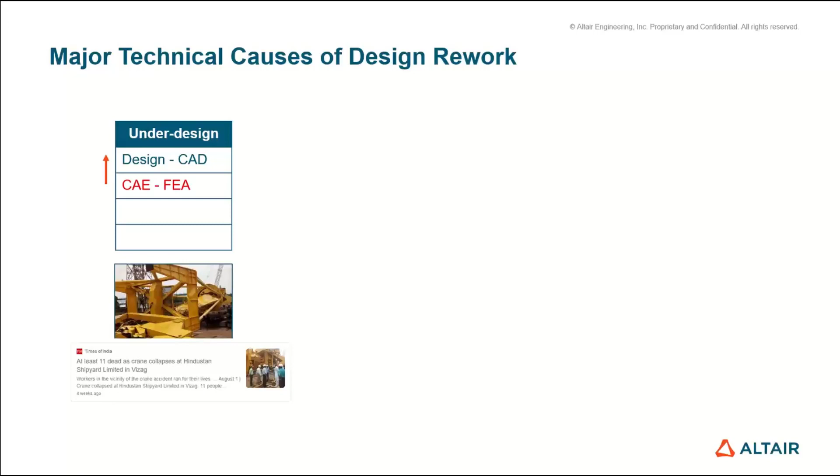This will cause a time delay. On the other hand, over design is not that critical, and sometimes it goes unnoticed for many reasons, and that also affects us on the project side because it adds to our material cost as well as other operational costs. If it gets noticed, that will again create a loop of redesigning.

The next one is integration issue, where especially when projects are complicated or mechanisms are involved, there might be integration challenges. Although the design is well designed, there might be integration challenges, interference, or unnecessary clearances. These things create problems at the integration stage, and that might come back and create a redesign or rework loop.

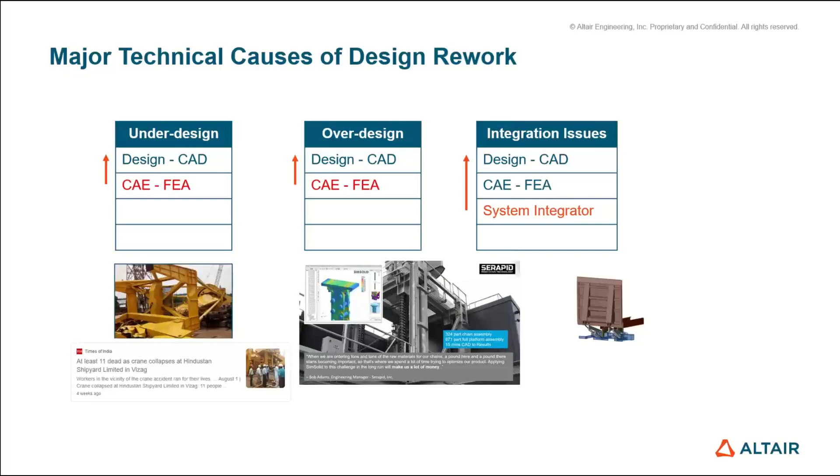Another critical one is manufacturing issue, which might get detected during the supplier or prototype stage - it can be detected either at the supplier end or the prototype end. Again, it can come back to the design stage and create the design rework loop.

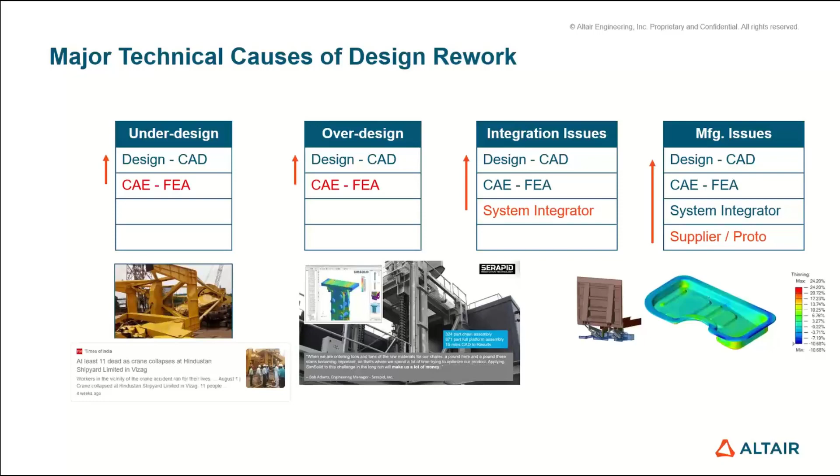So to address this issue through our tools, what I am going to talk about today is the Altair tool or platform called Inspire, which is our simulation driven design platform.

We will take an example to show how these different causes of design rework can be addressed using different parts of this platform. For those who don't know Inspire, this is a very easy to use yet accurate platform which has a unique capability to interact with multiple of our proven solvers, like MBD solvers such as MotionSolve.

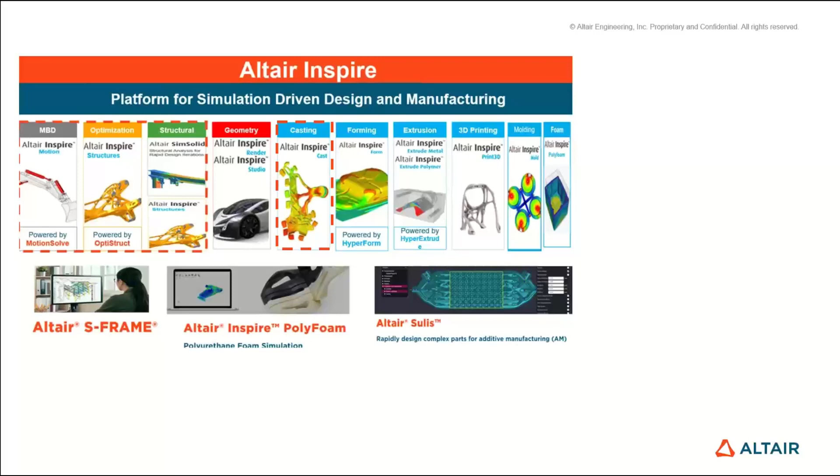It can be interacted with or accessed - it can access the solver like OptiStruct, and it can also access our different set of manufacturing solvers like casting solver or injection molding solver and so on. It also can access our newly acquired solver, that is SimSolid.

For those who don't know SimSolid, it is a structural simulation solver that operates directly on original, unsimplified CAD geometry and doesn't require a mesh to be created. It also gives very accurate results in a much faster time span.

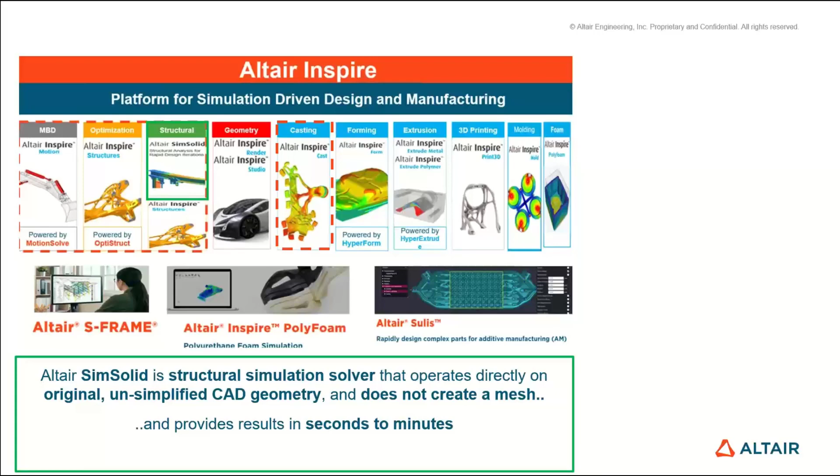So all these things together, we'll see how to take and solve those design rework issues by taking the example of a hydraulic tailgate lift. This is an attachment mostly for a pickup truck, where a heavy component can be lifted in the pickup truck easily because this platform moves with hydraulic actuation.

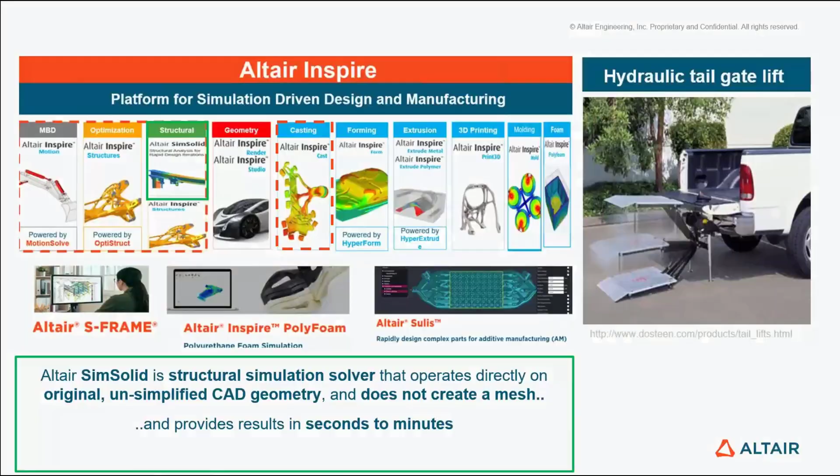It also acts as a flap to close the pickup truck's end. So without further ado, let's go to the tool and show how these things really work.

We'll start with the CAD version of that hydraulic lift, and then what we'll do is in the first stage, use the SimSolid solver.

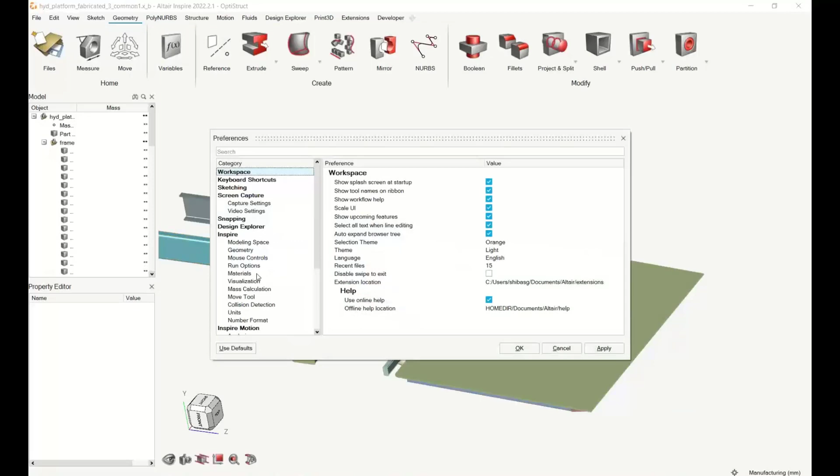We'll use the solver as SimSolid here, and then what we'll do is try to apply the necessary loading condition. In this case, we are going to apply a 2.5 ton load, and we are going to apply the boundary condition.

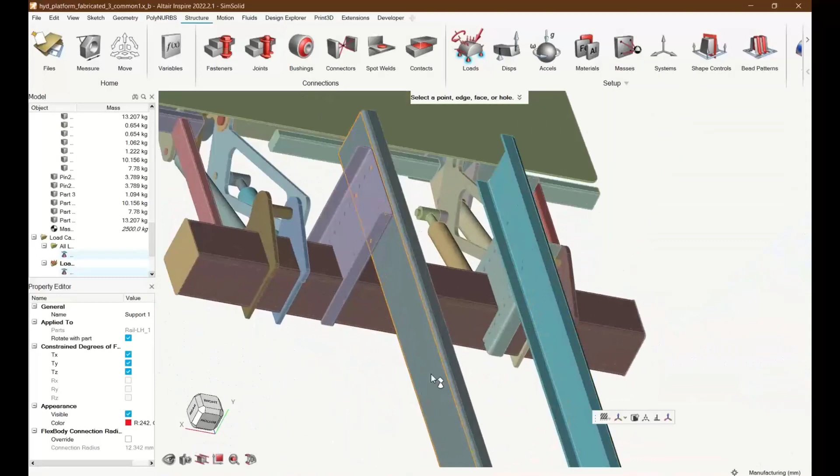Basically, this is where we are fixing this structure, and this is part of your car structure. We also have to make sure that our gravity direction is in proper manner, and then we'll ensure that our connections are created all right.

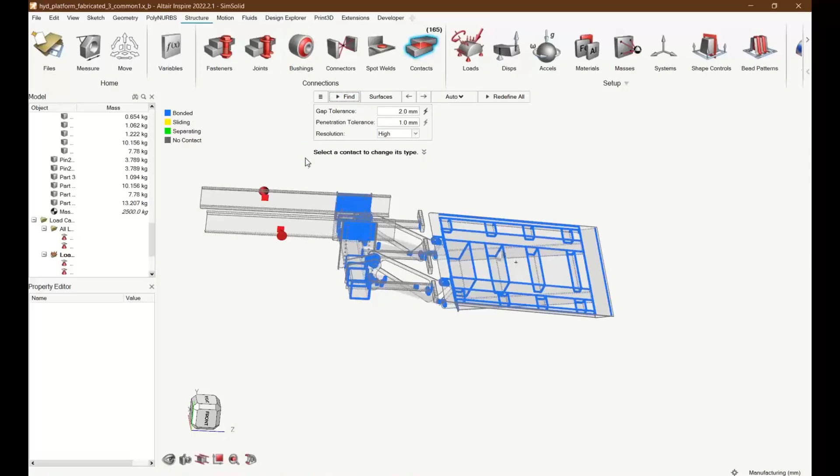So here I am trying to create a little more detailed connection. I know I'm not going very deep into each of these tools. The reason for that is there will be subsequent sessions where each tool will be explained in greater detail.

So now once this much is done, we can go ahead and run our first iteration of the solution simulation to understand whether it is under design or over design, or how is the stage. As I said, it is using SimSolid as a solver, and SimSolid has its own unique capabilities of not needing a created mesh, and also the speed.

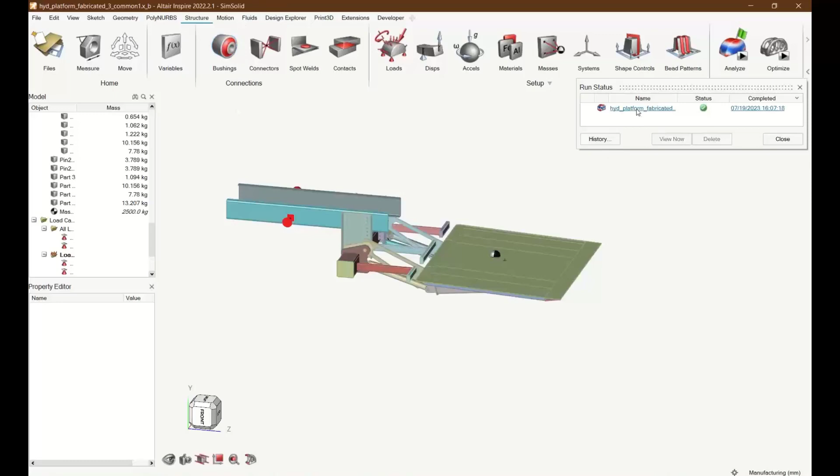And you can see that over here. This is a reasonably big platform, and you can see that I am getting a kind of displacement or deformation in the range of say 23 mm.

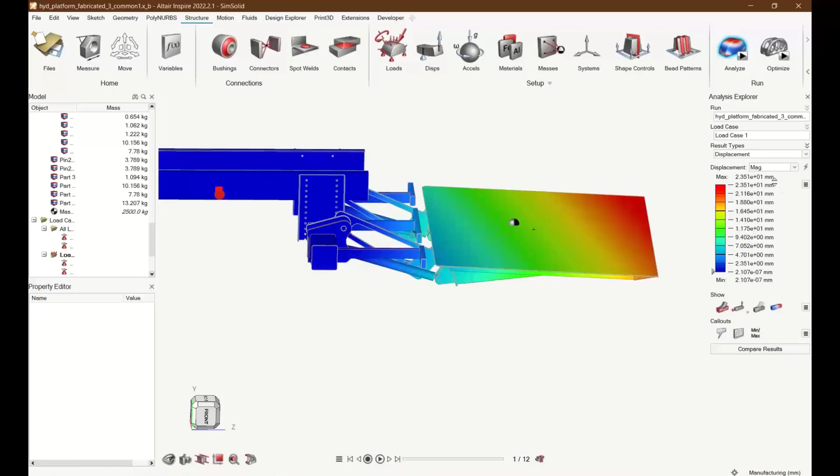Anything beyond 21 is not considered a very good design. Of course that number can be debated, but for this particular application, I am fixing that at 21. So with that logic, this goes into under design.

So now the question is, if there is under design, how to tackle this under design? There can be many things which can be changed in the structure, but for this particular use case, what we are changing is this: we are focusing on these two arms.

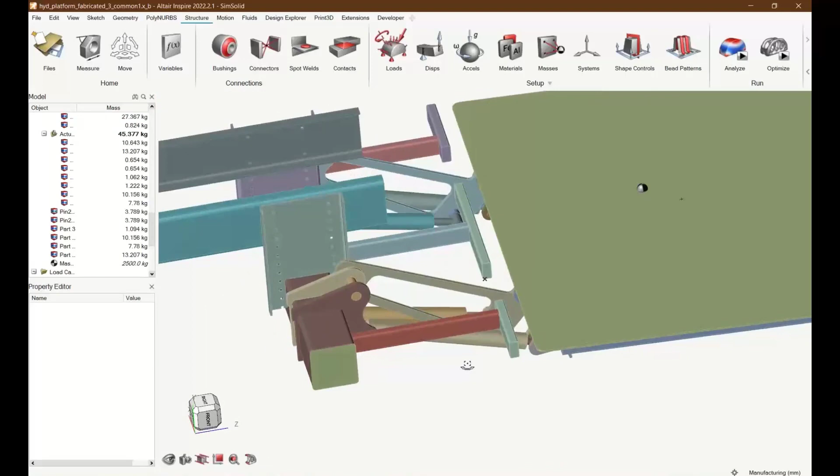And if I have to redesign or modify the design of these arms, what are the parameters I can really redesign? So what I can see is, if I have to keep this shape and play with the parameters, I will probably play with this, my first parameter - that means the width or depth of that arm.

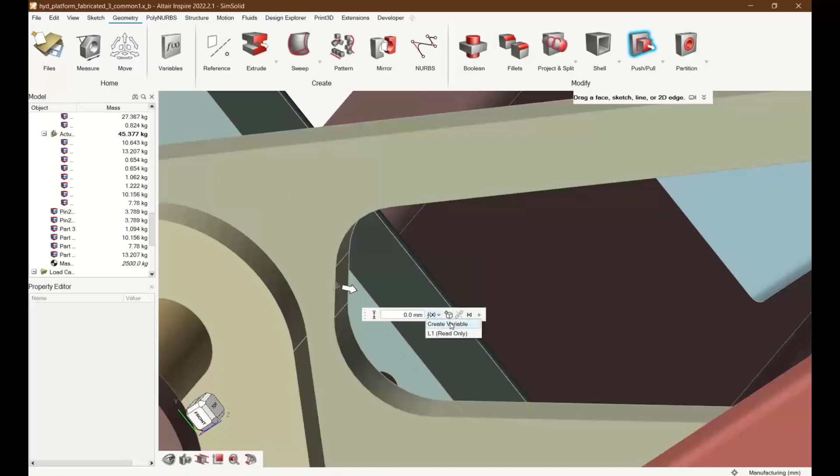This could be my second parameter - that means this dimension. This could be my third parameter - that means this internal cutout's depth.

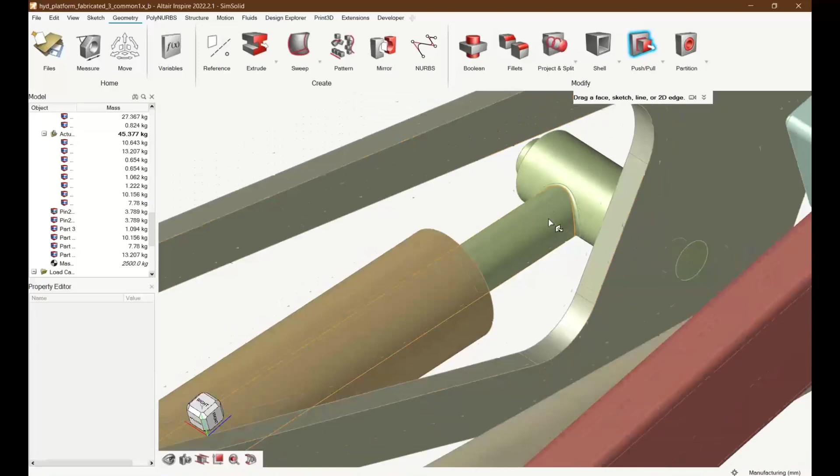And I can also play with the other two sides of this cutout. So that would be my fourth parameter, and this could be my fifth parameter. So I'm just creating these five parameters to play with the different dimensions of this arm.

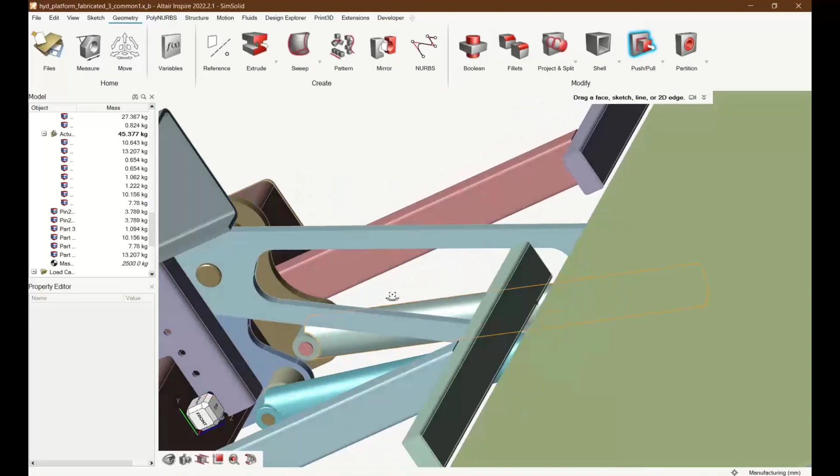And I will simply copy those parameters to the other side of the arm as well, so that all of them kind of come in sync. So what I'll do is keep this as parameter 1 and this as parameter 2. I'm not creating another new parameter, rather I'm using the same parameter and giving this as another parameter over here - just copying that parameter.

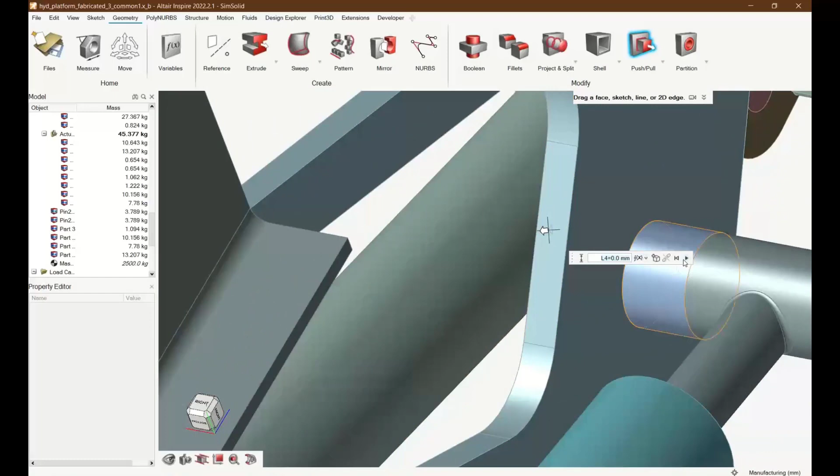So this dimension, and then I will similarly use this dimension to make it the fourth parameter. And then this one is my fifth parameter.

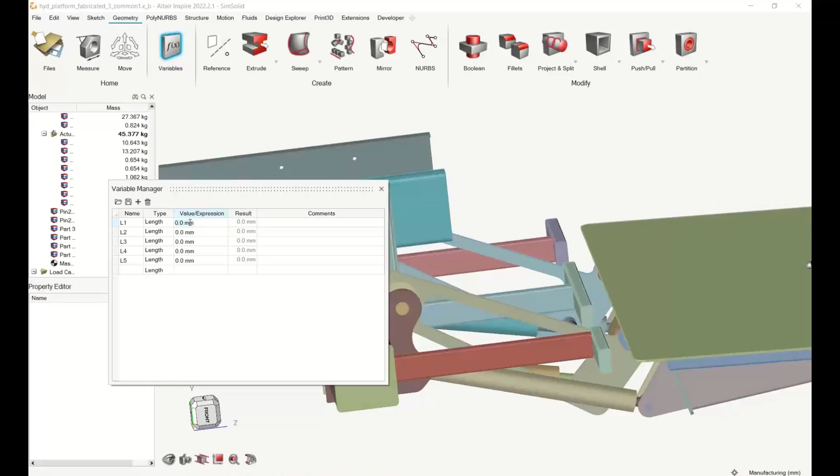So now I have all these parameters defined for this particular arm, and I can play with them. For example, now I want to change the depth of this particular arm by another 15 millimeters. Let me do it again - so I can change it, and similarly I can play with any of those parameters.

And then I can quickly go and check my displacement, which I'm targeting. So I can go and rerun this model again, keeping everything else the same, and we'll try to assess the structural response, mostly the displacement, over here.

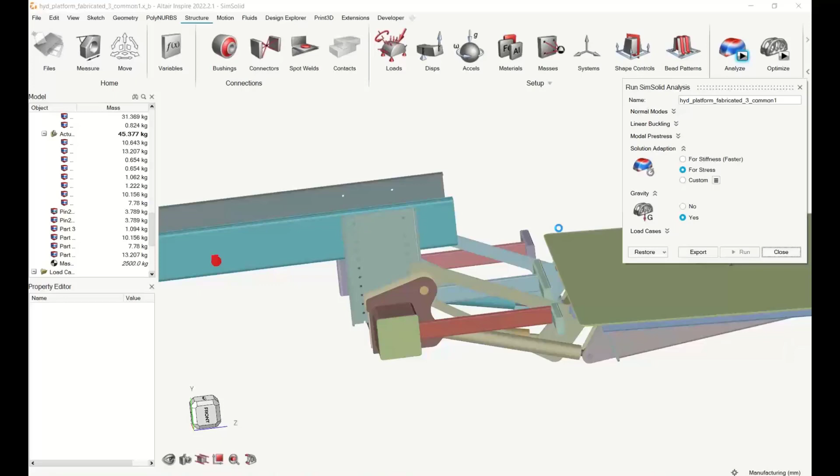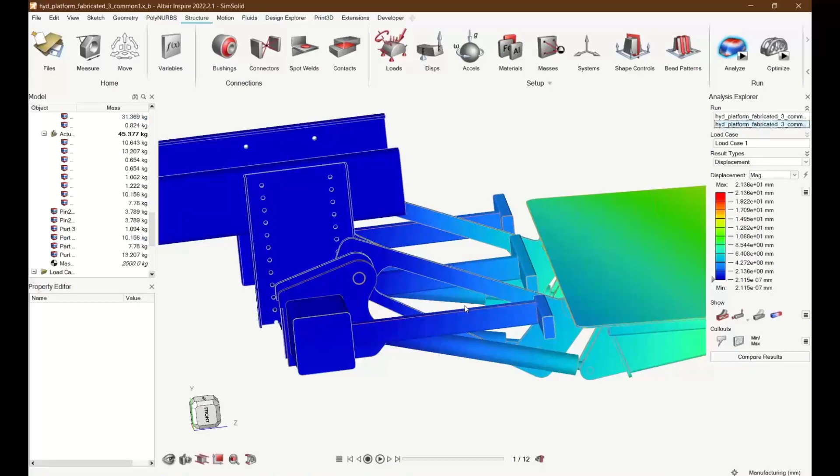Let's see how my change on this parameter plays a role in the target value - that is our overall displacement of the complete structure. So it is done. Now I can check, and you see that it indeed helped me. So from 23.5, it goes to about 21.3, so it is moving from under design towards maybe the better design.

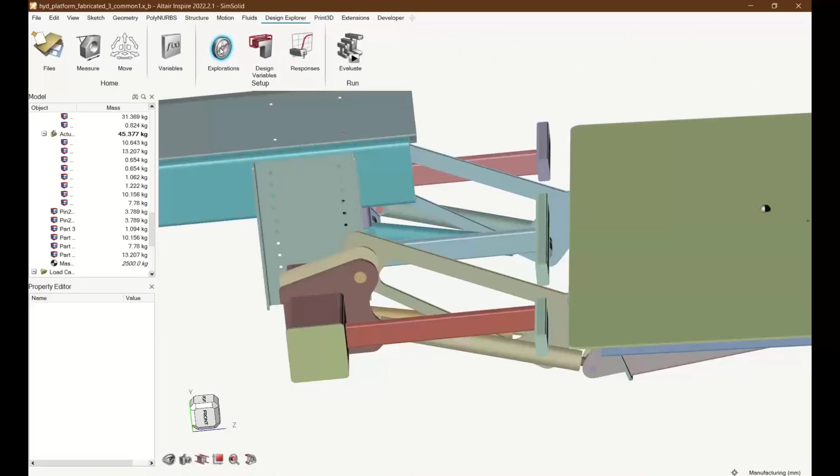But you might have observed that this is not the most systematic way to do this. What if I would like to play all possible combinations of these parameters in a more systematic way? That's exactly what we can do through our design explorer available within Inspire. Of course it has another version available in other tools like HyperWorks as well, which we'll discuss next session. Here what we're doing is accessing all those parameters we have created, and doing an optimization study with these variables.

So now I'm telling that all these variables, all these parameters can range from say 0 to 25. We'll change this from 0 to 25, 0 to 25, 0 to 25, and so on.

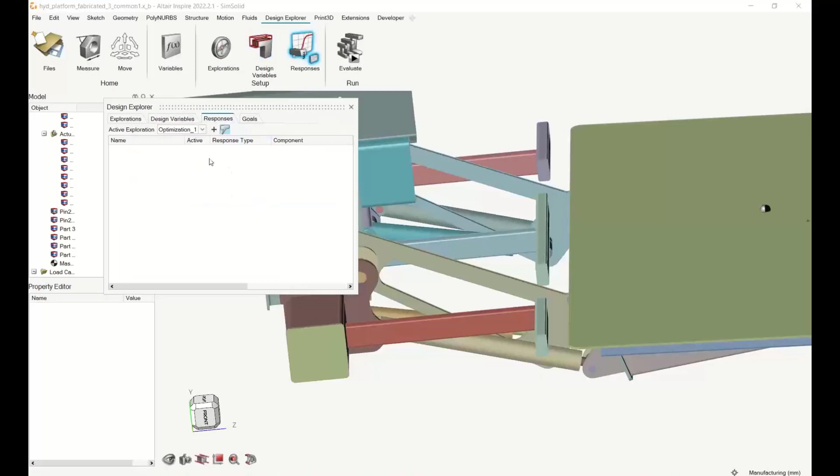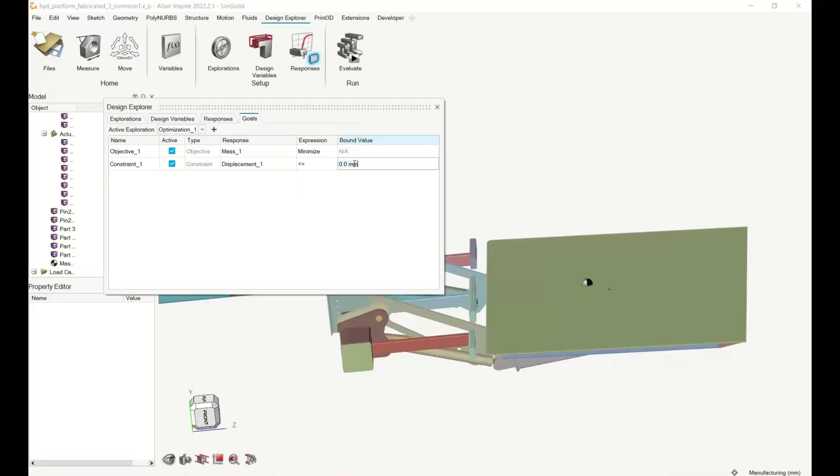Once I'm done with that, I'll take the responses. I will take two responses: one is displacement, the global maximum displacement, and another response that will be my mass. So I'll take both of these responses and set up my goals. My objective would be to reduce the mass, minimize mass, and I would also like to constrain my displacement, say below 21 mm - that's my target.

Then I can run all the iterations. Here it is telling 50, and I can simultaneously run multiple iterations as well based on my server or PC's capacity. I'm not running it now, since that will take maybe 5-6 minutes, but I'll show you how it will look when it runs.

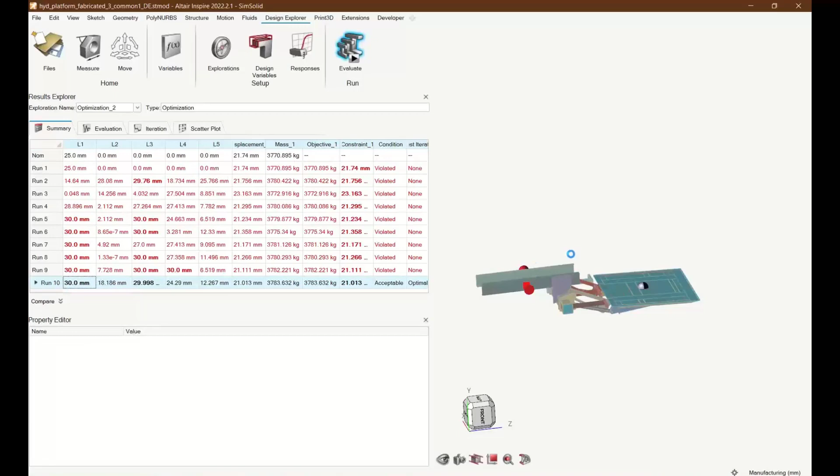So you see that there will be, in this case, 10 runs, and I see one iteration where I could achieve close to 21. If you see the initial run, it has a displacement of around 21.74, and it has come down to 21.03. If I load this run, you can understand the result in much more detail, like we did for other runs.

Then we can also compare this - I can say, compare it with the nominal run, and you can understand how these things are varying. You'll see that it is 3% lower than the displacement of our initial best by expanding the thickness, and of course with the cost that it will have a little more extra mass. So you'll see that mass has been added.

But this is, by far, another approach where if you want to parametrically modify your design to make it properly designed, you can of course take help of this design explorer.

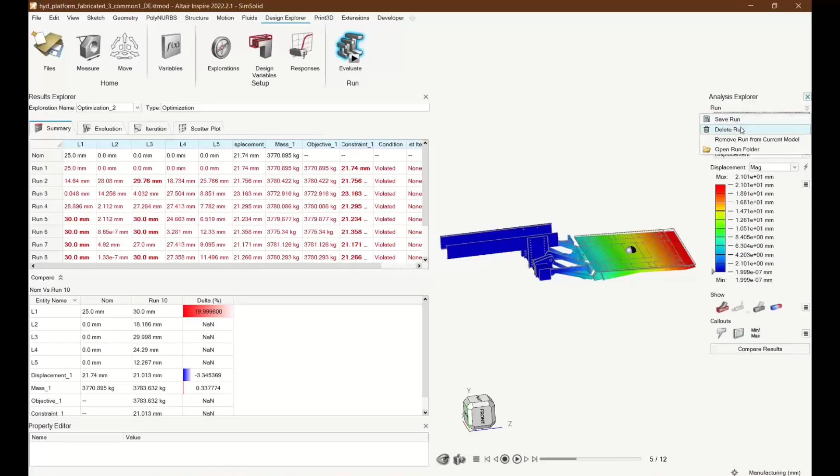What if I want to explore more? So this study we have done - if you remember, we did it in our SimSolid solver - and I want to do further detailed study in SimSolid. Can I do that? Answer is yes. So all those things set up in Inspire using SimSolid can be taken to a native SimSolid solver, and you see that everything has been set up.

And you can then do further analysis, advanced analysis, such as nonlinear study, thermal study, transient or vibration studies, or fatigue studies, and so on.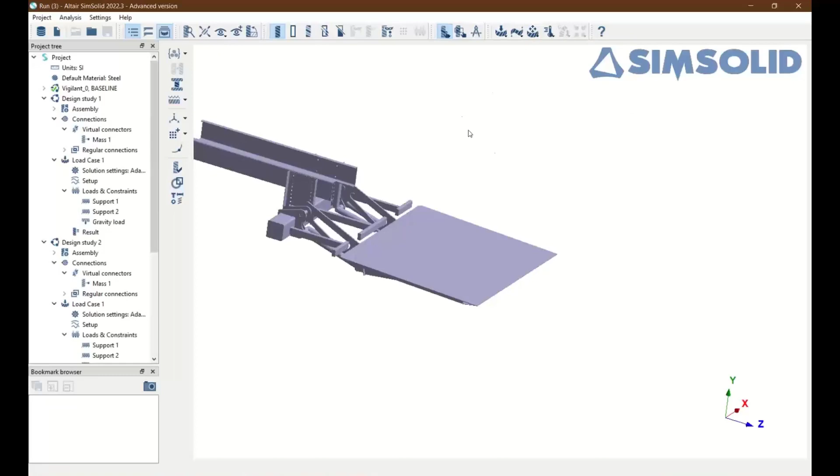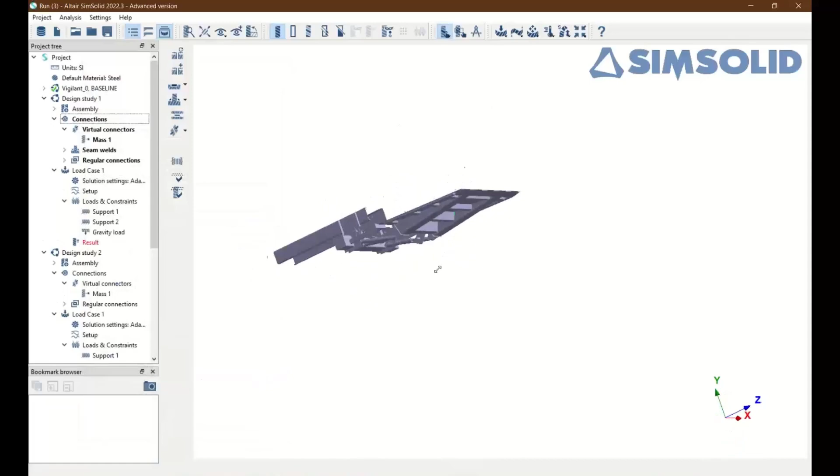You can also enrich additional connections. For example, I want to enrich this load tray with additional welding, so I can do that very easily. I can go ahead and say that I want to connect it with welding, and with that I can do further study here.

So I can go ahead and check how my result is getting changed after adding the additional welding connection. Of course, I would not expect a huge change in the result for obvious reasons, but it opens up a door to take the setup in Inspire and do additional study without putting extra effort into setting it up here. Of course, you can do setup here as well, so it might be more meaningful if you do it for other studies, for example consequent study or combined study. You'll see that it has not changed.

But what you can do is, because you have changed the welding connection, you can also get additional response like welding reaction forces, which might be useful. I'll stop with SimSolid at this point because there are subsequent sessions detailed on SimSolid, a subsequent coffee tech brew session.

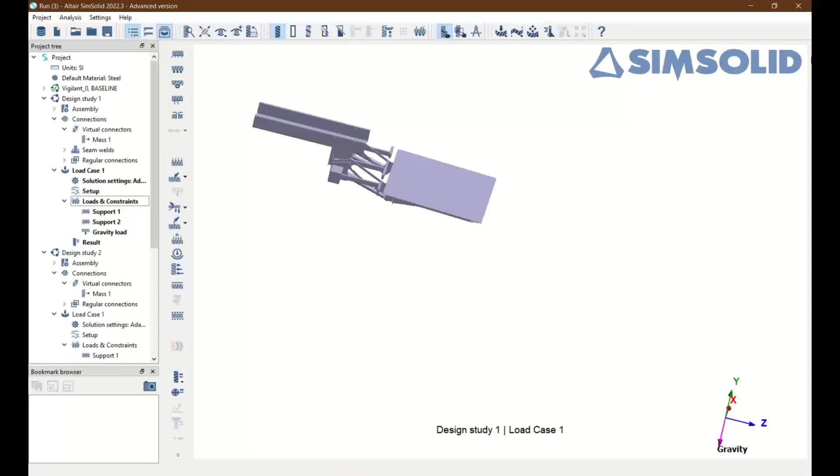So now what I want to show is what other options you have as far as modifying this design to make it properly designed.

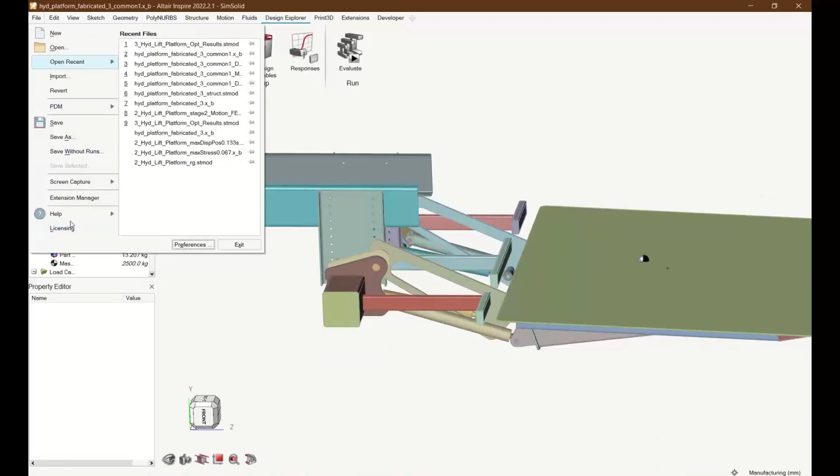One more option you have is using an optimization method, not parametric optimization, but using our solver OptiStruct to do a topology optimization.

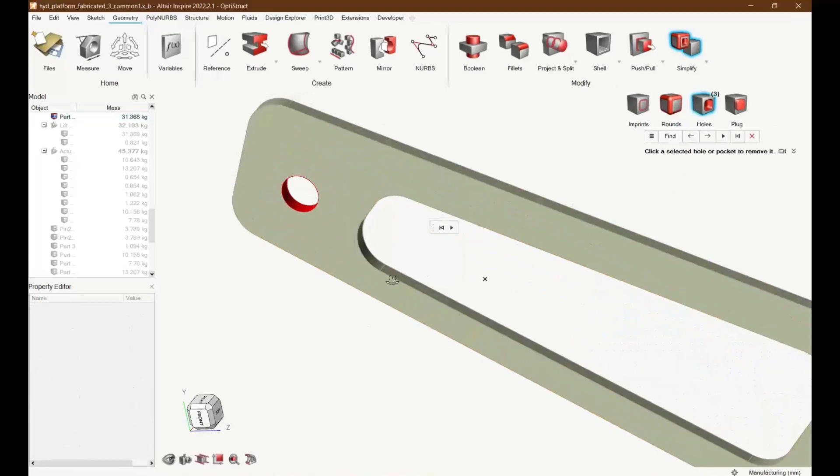To do that, what I can do is isolate this geometry, and then simply remove these cutouts from here. I'll find this cutout and remove it, and then I'll declare this as my design space.

With the same loading condition, I'll go to my structure, and instead of running analysis, I'll do an optimization. Here I can give topology as my type of optimization, and I want to give the percentage of material removal.

Here I'm saying that I'm removing 70% of my material. You have other options as well. For example, you can give factor of safety, frequencies, or certain frequencies to be achieved, or minimum thickness to be achieved, and so on.

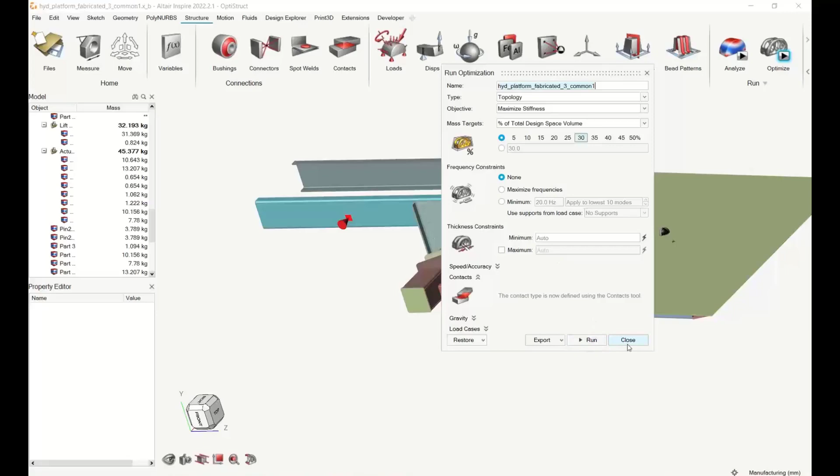And you will run it. Once you run this, what you will get is this optimized shape, which will help you visualize your design, which might look very unobvious.

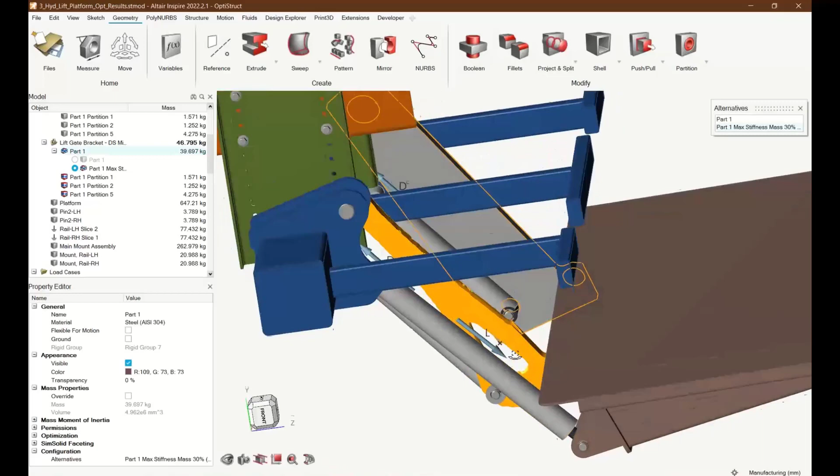This is a design where you are challenging the basic architecture of your existing design itself, and you see that this is what you got. This is the most optimum one through topology optimization.

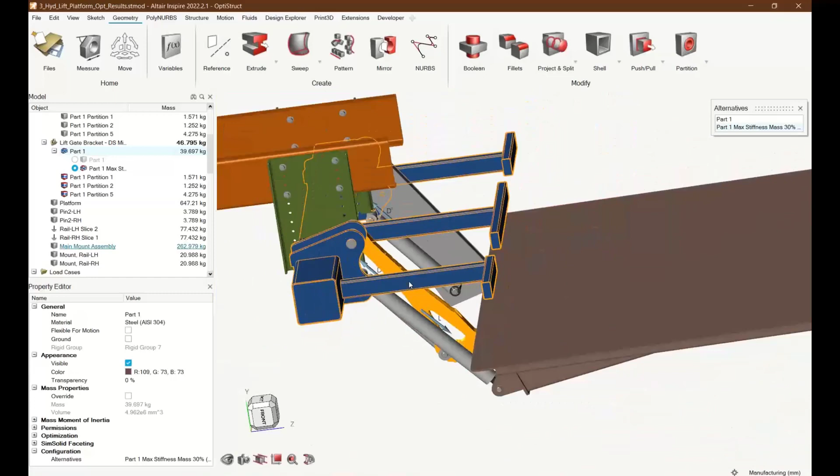Now, I also talked about how to check the fitment issue, or integration issue. So what will happen if there are some integration challenges? To handle that kind of situation, I will just bring back my old model. So here I have started.

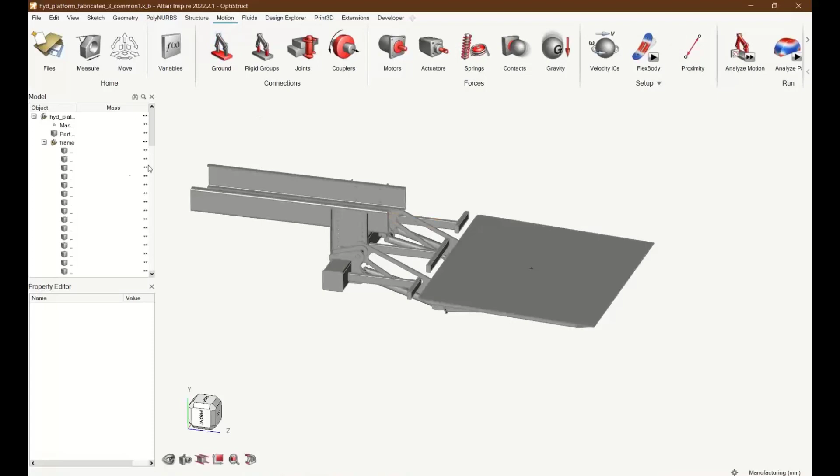What I'll do is take help of our MBD solver, which is MotionSolve, a well-known solver in the industry for a long time. Here what I'll do is set up this problem.

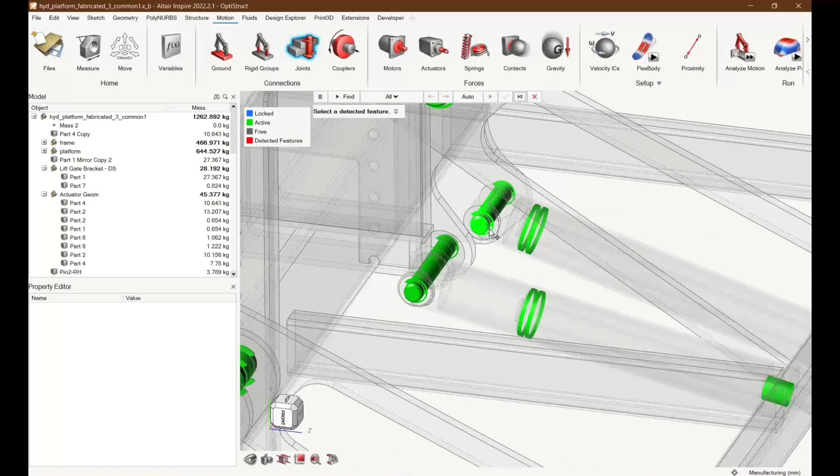It's again very easy. All I have to do is make sure I have the rigid group in place, so this is my groups, and then I'll create the joints. You'll see it automatically creates the joints where required, and these joints can be customized — it's not that you have to go with the same joint that was suggested.

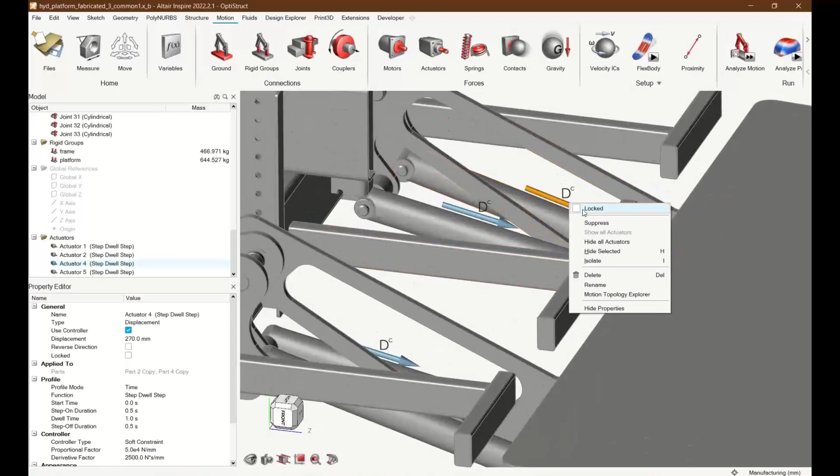Once the joint is done, you can define your actuators. So these are the actuators, there are 4 actuators in this assembly. This is another actuator — this is the wrong one, I have to delete this. And then you can define the properties of the actuators very easily.

For example, I'm locking these 2 external actuators, and I am also making sure my gravity direction is correct, and I am adding the mass it should withstand like before, that is 2500 kg, and that's probably all.

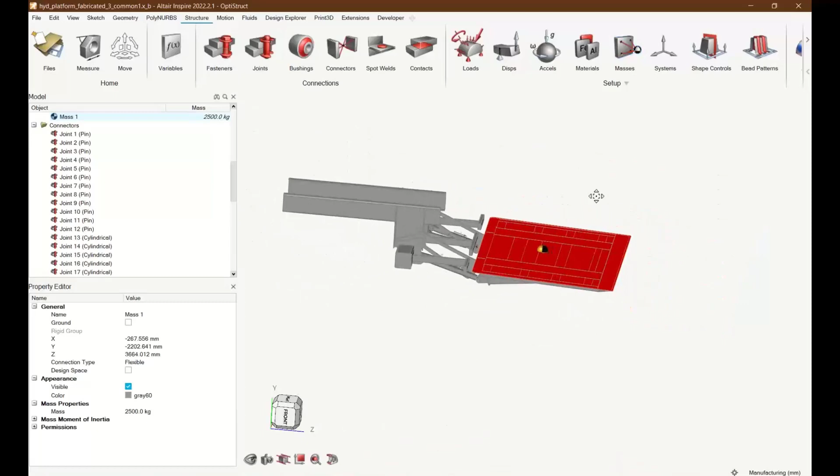Apart from this, we have to ground this particular member, and then you can go ahead and run this simulation, but this time through MBD. So you'll run it.

So it will give you the animation or the simulation, and all the information you can extract after this.

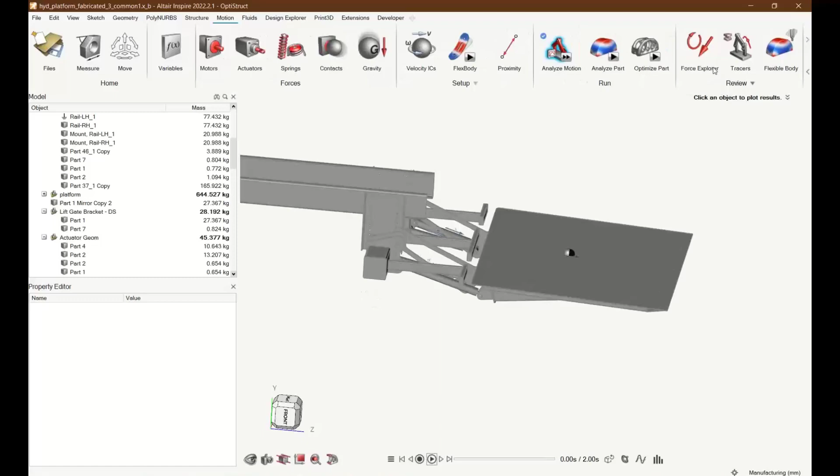The most first and foremost information you can get out of the simulation is the loads coming on different load points or hard points of this system, which is very critical if you really want to go deeper into any component. For example, for the arm, you can very easily extract this load and output it.

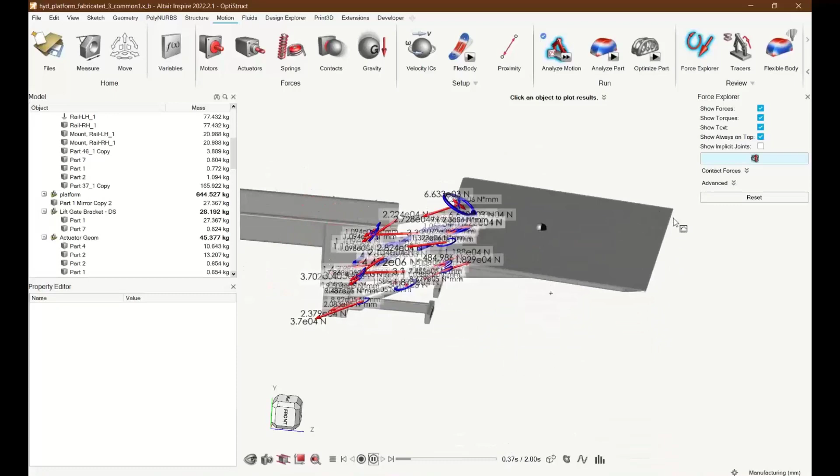You can also extract the forces that stand or forces required by each actuator, which is also useful to design or size your actuator. Most importantly, you can understand the fitment issue.

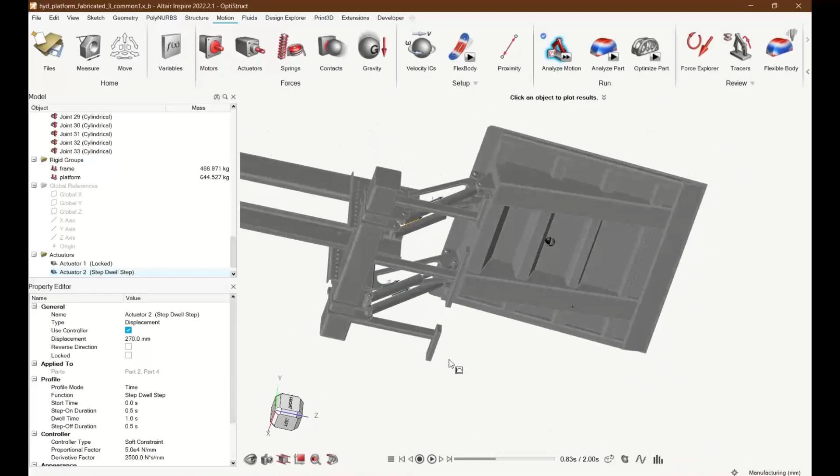For example, if you see the rod over here, or the bracket over here which is suspended and protruded, and the platform over here, if you see from any particular view, it will give you a not-so-clear picture of whether it is going to interfere or not.

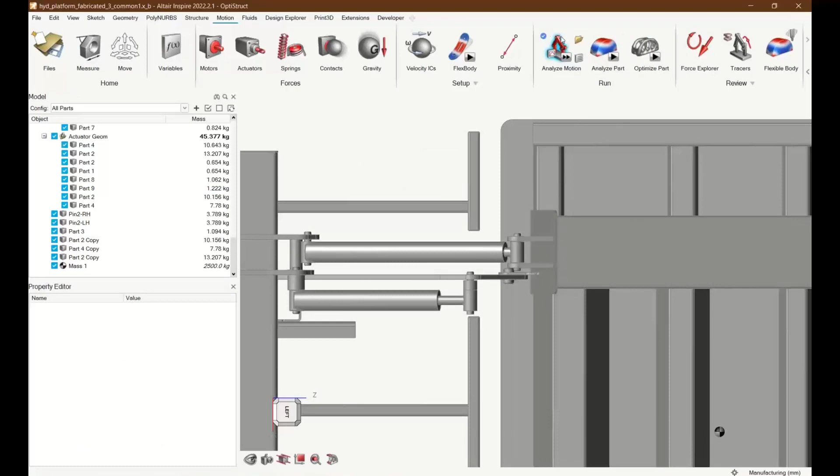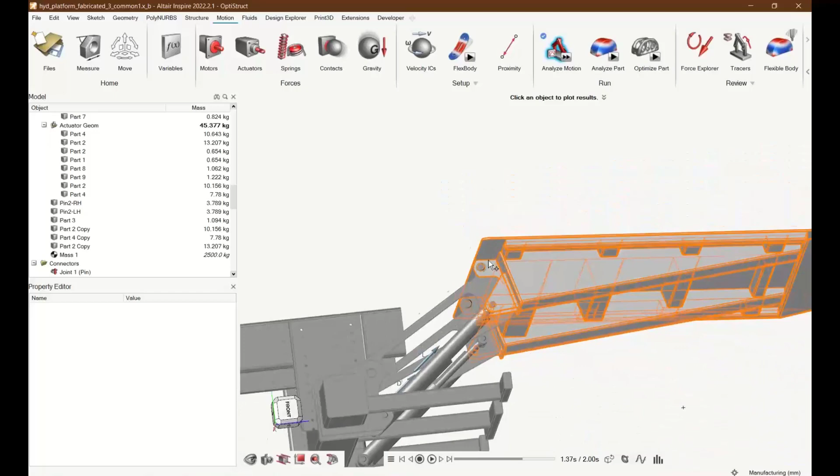Let me change the color so you can understand it better. If you see this in this view, you won't have a clear picture of whether this bracket and the platform are going to interfere. It looks like this is going to interfere from this view, but from this other view, it looks like there's a huge gap. So as a designer, you might not be sure from a static position what the actual distance is.

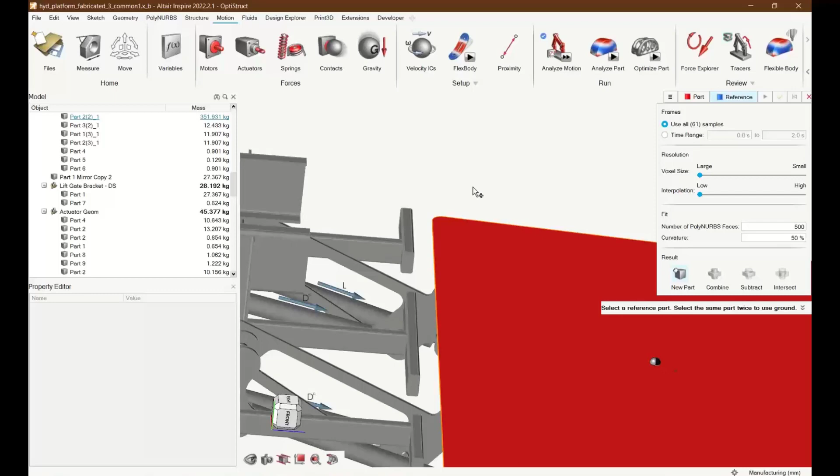What you have to do is take what we call a part envelope. It will automatically give you different instances of a component for different positions of its travel, creating that geometry for you. So now you see it from this position to this position, and none of the positions are actually interfering, although from this angle it looks like it might hit. You can export this as CAD and do your DMU study very easily. That's how you can do the interference study.

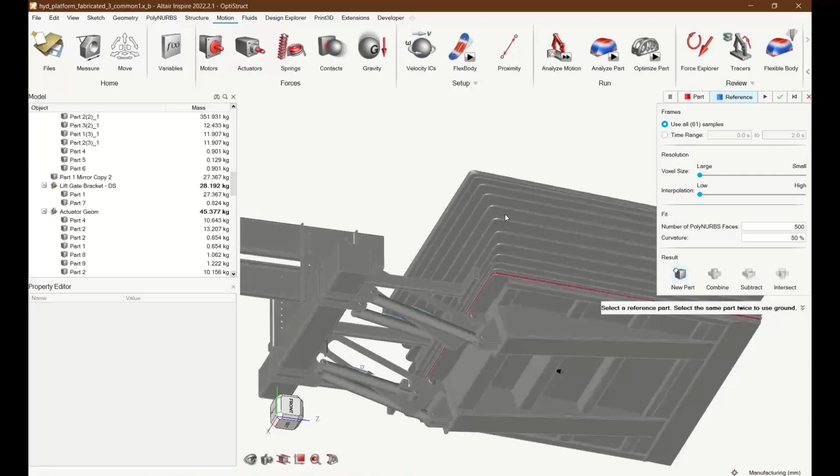There are many more tools like this, but I'm explaining everything at a high level since that's the purpose of this first session. Each topic will be explained in much deeper detail by respective experts in subsequent sessions, so stay tuned. With that, I'll go back to my presentation and show you a few case studies.

As you know from Lean Six Sigma and other philosophies, the more you allow a defect to travel, the more cost you have to bear. So the whole idea of this simulation driven design is to find the right design from every angle, right at the designer's desktop.

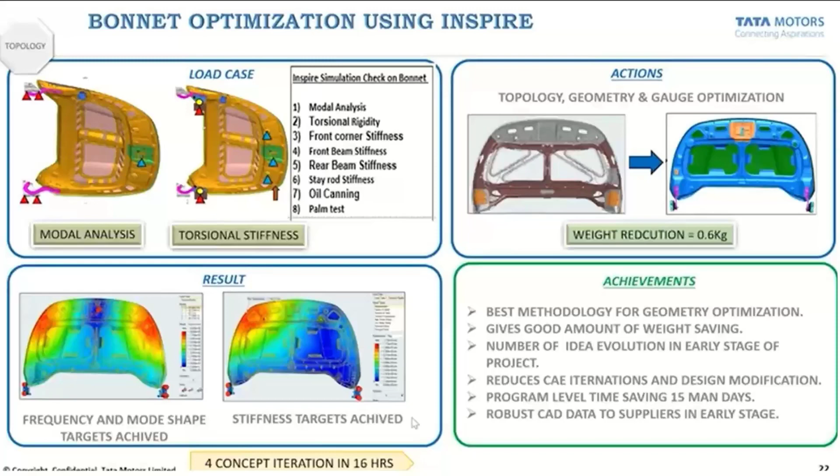Here's another example that's a little offbeat. If you're an automotive designer, you might not handle this kind of problem, but people designing plants need something called a gripper, which holds the car from one station to another. Those grippers are held by a robot with limited capacity, and cars are getting heavier and heavier. So the gripper has to be optimized or right sized - this is where over-design comes into the picture.

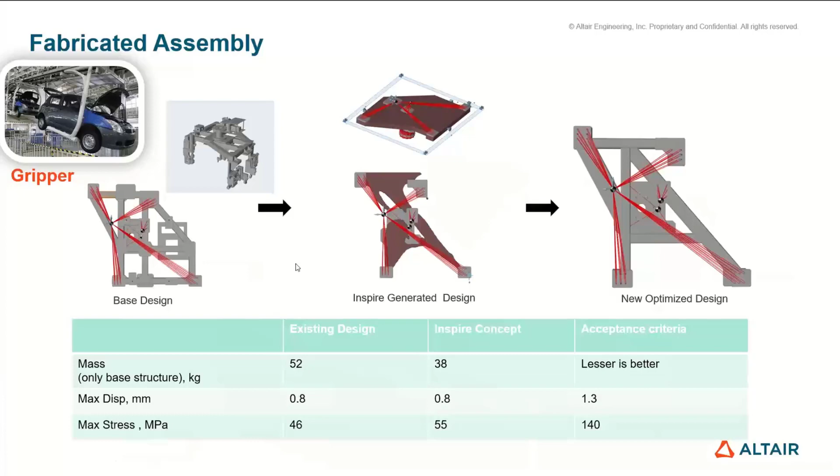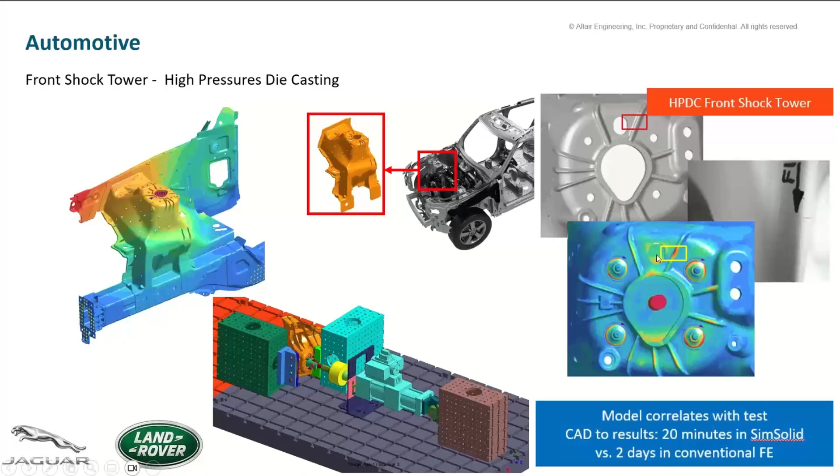This is another example of right sizing, or discovering the defect at the design stage, using our technology called SimSolid to evaluate a shock tower at different scales. You see it evaluated at a component scale here, at a sub-assembly scale here, and at a test rig scale over here. That's the beauty of SimSolid - the solver has such high capacity that you can bring in as much as CAD allows, and very precisely quantify your problems upfront during the design stage.